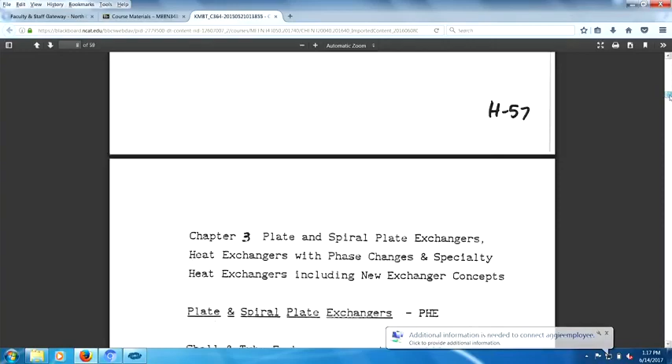So we're starting off on the second set of notes, about a couple pages in. We left off talking about the plate heat exchanger, and we were giving you an example of a plate heat exchanger.

Shell and tube's not suitable for small holdups. Transfer is fast with suspended solids, so there are limitations to shell and tube. As you should know, in design there are limitations and advantages versus limitations.

Here's a picture of our plate heat exchanger. I was saying I wouldn't own one. If you don't open it up, you keep it on, don't clean it, say for 10 years, this would be a great piece of equipment.

However, you got to recognize there's significant gaskets in here. Once you open it up, you have to buy a whole new set of gaskets, and it's quite a challenge to re-gasket this thing. Since there's gaskets between each plate, I often say this heat exchanger is a gasket. The heat exchanger is limited by the properties of the gaskets.

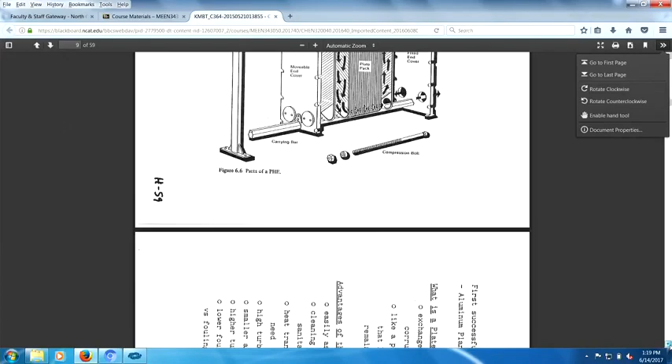So my recommendation is don't use this heat exchanger. Okay.

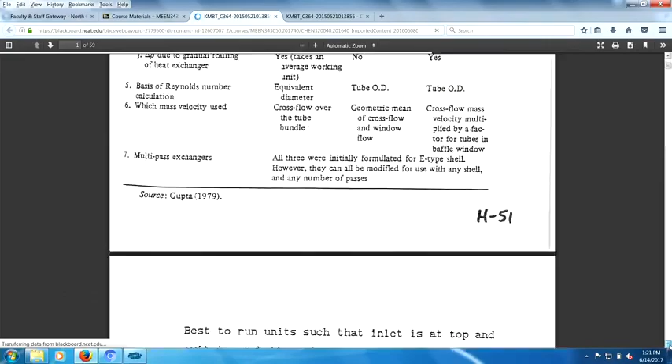Let's see if we can get actually this thing to work right for a change. It's not working right. So we go around. It's not working at all. Anyway. So let's see here. What do we got here? Apparently it's not reading a page, and it's not reading counterclockwise or clockwise. Pretty disturbing, huh, gentlemen and ladies? Wait a minute. We first page here, second page here, and now we got our problems here. How do we get this to be rotated back? And we see that technology fails us again. Simple request. It doesn't work. So what do we want to do here? We want to go back to this thing and reopen the notes and see if we can open them up again. So let's see what we run them down through here. See how far we go until we... there we go. We got this.

So this is one that we were looking at before, and now we continue on. I used to think APV was aluminum paint company, aluminum plant and vessel company. Maybe that's what it was.

First commercial design was 1923. What is a plate exchanger? Like a plate and frame filter press, if you know what those are.

Advantages: easily assembled and disassembled. Cleaning is easy. Meets most stringent sanitary and hygienic requirements.

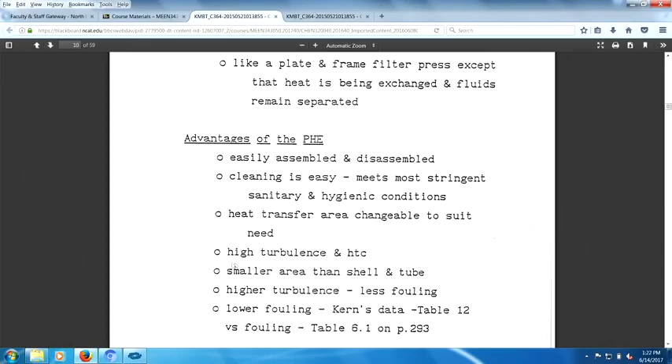Heat transfer is changeable, you can add more plates. It's very important, high turbulence, high heat transfer. A lot smaller area than shell and tube because it's a lot better in the way of heat transfer. It fouls less as well, with higher velocities and less fouling.

Velocities are low, low temperature approach. The log mean temperature difference is fully used. Leaks usually go to the atmosphere, not to the process.

Bad gaskets can be changed. Again, as soon as you open it up, old gaskets never reseal. Low hold-up volume is an advantage.

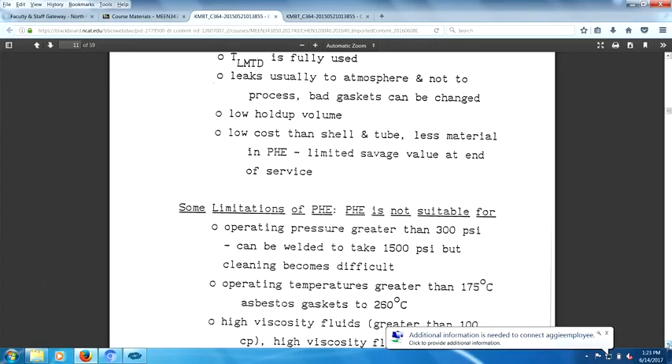Costs are lower, there's a lot less material in here. You're looking at around 300 psi. Now you can also weld the plates shut, so you could possibly go up to 1500 psi. Gaskets usually go to 175C or 260C, depending upon exactly what it is.

Yes, asbestos gaskets do exist. That's pretty hot, and the pressure of 300 psi is pretty high pressure, so those two conditions make it quite a versatile heat exchanger for low pressures and temperatures. These are pretty high temperatures, and high temperatures somewhat.

Velocities, well, 0.1 meter is pretty slow. Average velocities, you're looking for about 2 feet per second. Gas service, due to high pressure drop, includes duties at low pressure.

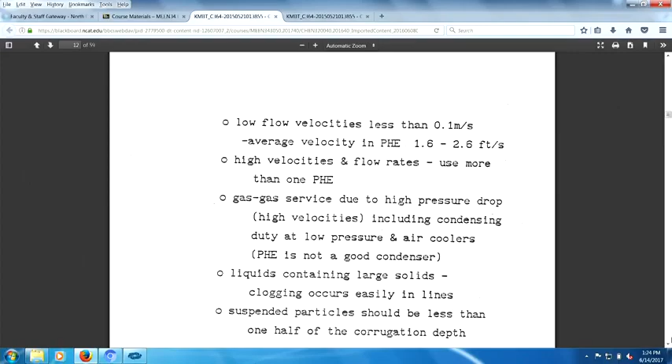Clogging occurs easily in lines, you don't want that. Suspended solids should be less than half the corrugation depth.

You're always worried about solids in the flow. High pressures cause plates to deform, and gaskets fail easily. You obviously need to pay attention to gaskets.

To buy one of these plate heat exchangers would be horrible, because every time you open it up to clean it, you've got to buy a new set of gaskets. The person selling the plate heat exchanger really loves you, because that means you'll have to purchase gaskets in the future, and he gets 5% of the cost of the new gaskets. He or she made 5% on that sale, maybe 10% on the sale of the heat exchanger to you. This is what I'd call an equipment rep.

When they sell you a plate heat exchanger, they're looking for further income in the future when you have to rebuy gaskets. So from their perspective, it's very advantageous for you to buy a plate heat exchanger. From your perspective as an engineer, not so much, right?

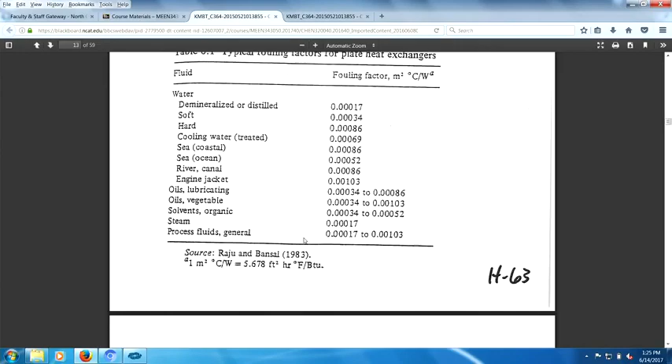Fouling's tough, it's a little difficult. Fouling in a plate heat exchanger is about 1/5 that of shell and tube - few stagnant regions, high turbulence, low residence times, less chance to foul.

Erosion, corrosion is about 2 mils a year. The plates are usually 20 to 40 mils thick. So after about 10 years, your plates may be disappearing on you, which I haven't really thought about - 2 mils a year, and maybe 20 mils thick is the minimum. So 10 years here will knock this 40 down to 20. That's not good. Usually what will also happen is corrosion will be localized.

So 2 mils a year may be an average, but you may have spots in the plates where there's higher corrosion, in which case the vendor will really love you. Erosion occurs from overcapacity use with suspended solids, and occurs over the entire plate. So you use erosion-resistant material.

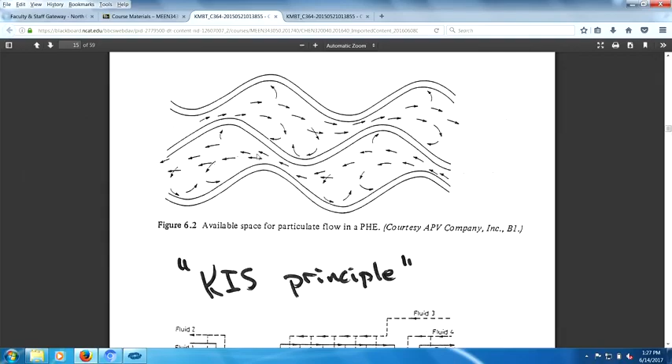Now, this down here is multiple duties. If you buy this thing for multiple duties, you can consider yourself stupid. This is just asking for it. Think a little bit - for example, I have this heat exchanger, and I have to take it down because it's heavily fouled. But because of the stacked nature, I also have to take down this process, and this process too. This ain't a good thing to have.

This down here says multiple duties - see the word 'don't'? What you want is one plate heat exchanger for one job, another plate heat exchanger for the second job, and a third plate heat exchanger for the third job. It's called the KISS principle - keep it simple, sweetheart.

I'm always amused by stupidity that's published, I find this quite interesting. There's a lot of stupid stuff out there, and not only that, they actually sell it, and some people think it's the best thing since sliced bread.

What happens is you give two different people the same piece of equipment and ask them to write a performance review on it. One group will say this thing is the best thing since sliced bread, and the other group will write up a report saying this is a piece of trash, get it out of here. Same piece of equipment, two different evaluations that do not agree.

Now, what happens is I would rotate this for you, but since I'm somewhat delinquent in my capabilities, let's try that again. Let's rotate it, we'll take a chance here, gang.

Pressure limits, temperature limits, flow rates, gaseous flows, high viscosities - look at that, plate heat exchanger is preferable. Flow maldistribution - this is spiral, flow maldistribution is possible. Heat sensitive stuff, you know, there are things that are heat sensitive. Heat recovery, all kinds of little items over here. And there are three different designs: plate, spiral, and shell and tube.

And here, oh excellent, continues on this thing. I forgot to mention that. I had this table 6.2, a great table making a comparison between heat exchangers. This is absolutely wonderful, and you got some more there.

And then you got this thing that we're going to try, I guess we got to click on it maybe, and then rotate it counterclockwise. That ain't working again either. Okay, so apparently we have another malfunction, so we just get rid of that thing right there. Uh-oh, let's bring it back up. Nope, can't bring it back up. There, we bring it back up. So what do we want to go? We want to go back here and hit this one more time. So since obviously we have a problem here, we get rid of that one, and we get rid of that one. So we're back to square one, and I guess this is the way I have to operate.

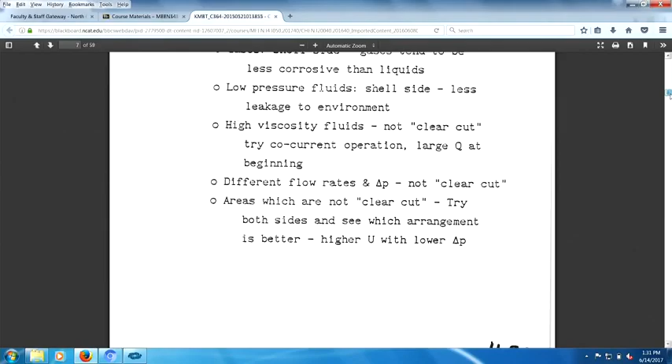So we went through the comparisons. Those are wonderful comparisons for you, right? There they are, wonderful items.

Then we talk about maintenance, inspection, and cleaning here. And you see basically students want an A. A is very good, B is acceptable, D is impossible. So if I take a look at a shell and tube exchanger, I ain't ever going to be able to expand that. And over here, I have a spiral, I can't expand that. But in this plate, I just add more plates. And you look at all the A's over here for this plate.

And then the leakage inspection is B. So they're apparently in a really nice attitude towards plate heat exchangers because they went to sell you one. Now over here you got a combination of D's and B's, and over here spirals. So cleaning, to be quite blunt with you, chemical cleaning, AA. Corrosion inspection, I would have to claim AA on that, I don't know why. Leakage inspection, I'm sorry, but that has to be AA, and this has to be AA, because we haven't really talked about spirals. You know, I wouldn't trust these guys down here. See this? I wouldn't trust these. Because spirals are really great heat exchangers, don't get me wrong. And the C down here for repair, I don't know.

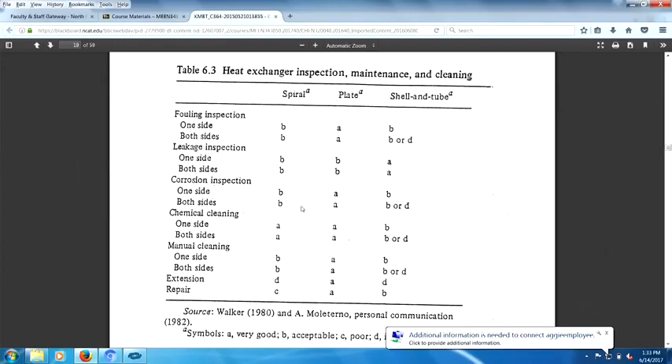Velocities, 3 meters a second, or 10 feet a second, is typical, right? 1 millimeter thick, that's pretty lightweight stuff here, gang.

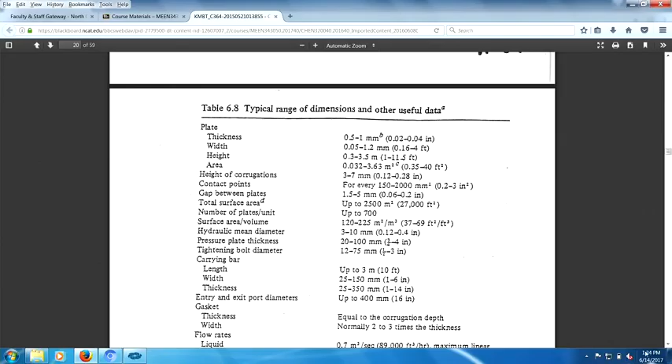Materials: you have seawater, titanium. With chlorine, titanium. What you don't want to have is chlorine and stainless steel. I got chlorine solutions with stainless steel, I'd be careful. I thought chlorine and stainless steel didn't go well together. That would be probably a test question.

Gasket materials, remember, this sets the limits on your heat exchanger. By the way, you'll have these notes for yourself when you take the exam. So what I would probably do was, what gasket material would you not use for fats, right? Or what gasket material would I use for oils? Well, there you go: silicone rubber limited to sodium hypochlorite and low temperatures generally.

Anyway, you got the gasket material, you got asbestos, and you can see that asbestos goes to 260 C. The rest go up to about 150 C, 300 Fahrenheit.

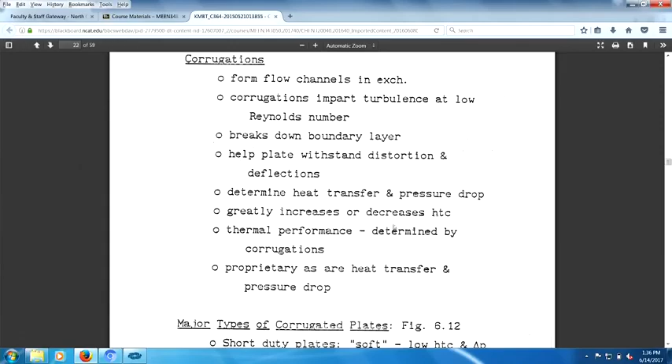Corrugations, right? Break up the boundary layer, determine heat transfer and pressure drop, greatly increase or decrease heat transfer coefficient. HTC is heat transfer coefficient. Thermal performance is determined by corrugations. Now they go into a big thing about corrugations. Whenever you see a V like this, they call them chevrons. One set of V's is called chevron, sort of like the company Chevron Oil Company. So this would be a long duty hard plate, this would be medium duty medium plate, and soft plate duty. And obviously you can see there's a lot more corrugations happening over here, right?

What is the difference between this and that? And you can see whatever these crosses are, it's much smaller over here. And I get the impression that there are more lines, more corrugations per inch here than over here, right?

I have no idea what this is. I don't like heat transfer units. You might get, typically, you want the log mean temperature correction factor to be above 0.7. So you want to maintain it above 0.7.

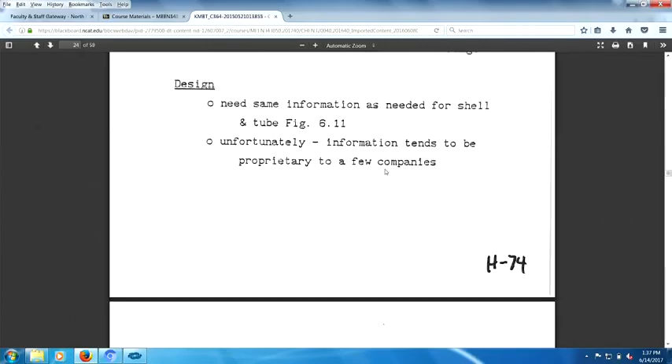Flow in a PHE, you have spiral, loop, complex flow designs. Basically, what do we got here? Here's a design sheet for you. All right, let's go back here.

Let me explain how you design these things. You just go to the company who makes these things and say you need this, this, and this, and they will do the design for you. Shell and tube design information is out there in the real world. If you do computer design of shell and tube heat exchangers, you're probably using some version of Bell Delaware. However, nobody was heroic and published information about plate heat exchangers, so a lot of that information is proprietary. As a result, you don't have any information, so you just turn it over to the company and let them do the design for you. Design sheet, all right.

I suspect that if you looked at the correlations, pressure drop and heat transfer coefficients will be similar to shell and tube heat exchangers. Leading coefficients will be different—that's the proprietary nature of those. The exponents on those will probably be different as well. Wide variety exists in equipment and applications, but physical properties are fairly constant.

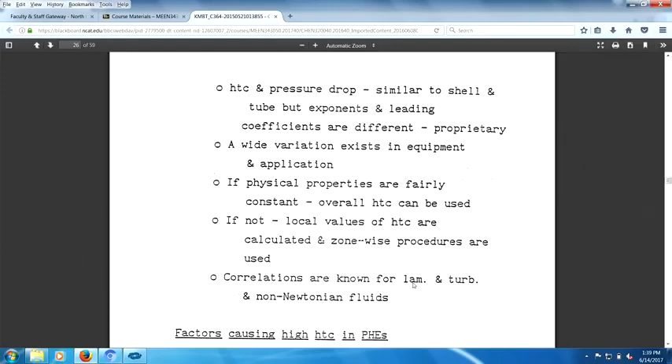Correlations are known for laminar, turbulent, non-Newtonian flow. High turbulence, great thing. Low resistance, easy cleaning, low fouling resistance—doesn't foul. Thin plates and the heat transfer coefficient typically there. Now a shell and tube, this would be maybe down around 300 or less—that's BTUs per hour foot squared degree F.

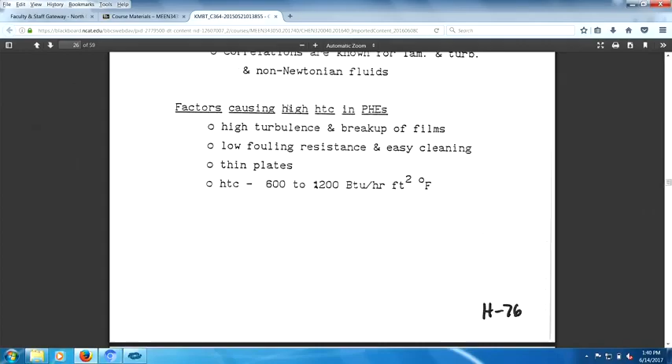Design—this is kind of a funky design method, I wouldn't bother. And here, I think this is what your book actually uses, a number of transfer units, if I'm not mistaken. But like I said, you just go talk to the vendor and have them do the design for you. You don't want to play hero—playing hero often gets you killed, right? So you become vendor dependent, and that's okay, so long as the vendor is capable. In which case, you should try to do vendor testing.

I don't know if you realize it or not, but they're just ordinary human beings, and you can have them take tests. Maldistribution—this is a major problem. Flow maldistribution occurs everywhere, a major problem in industry. Flow is not going where you want it to go, hence we call it maldistribution of flow. Occurs in particular with high viscosity fluids. When I say high viscosity fluids, that really means high technology type fluids, the things that matter. It usually happens with low and high flow rates, and for plate heat exchangers, it happens for long plates. Trapped air bubbles or trapped gas bubbles in liquids is not uncommon, and also due to different pressure drop differences in manifolds. I bet you don't know what a manifold is, do you? So we'll make that a test question—tell me what a manifold is.

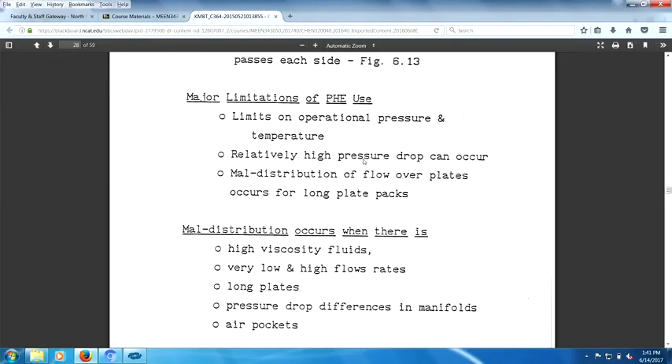Maldistribution affects heat-sensitive materials. Now, what is a heat-sensitive material? Most everything will burn, so most everything can be heat-sensitive to some degree—it's a matter of how much heat-sensitive it becomes. A good example of heat sensitivity is perhaps cooking. Heat-sensitive materials—food often burns, so obviously you've reached the heat sensitivity nature of that fluid. I suppose if you're making scrambled eggs in the morning and you scorch your eggs, it doesn't look good on the plate. That's a heat sensitive material, right?

Okay, other applications might be vaporizers and condensers. I don't know about that—climbing film condensers. There's no volume in a plate heat exchanger, so I don't know if I...

Anyway, let's go on to spiral heat exchangers. This is fantastic. So your assignment is I want you to go to the grocery store and buy a jelly roll. You'll notice a jelly roll looks like this, and this will be a spiral heat exchanger.

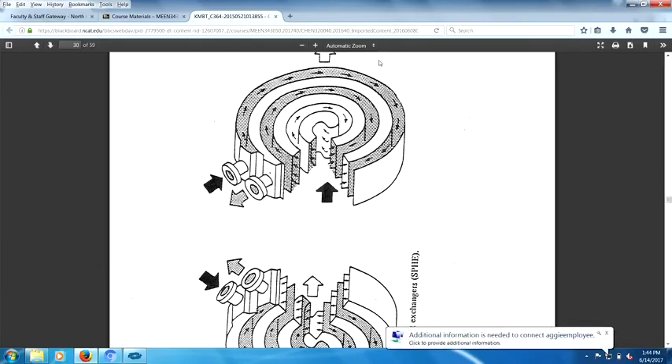All they do is take two plates and put them on a mandrel or shaft and rotate it. As they rotate, they wrap them differently—they put in spacer studs and continually wrap the heat exchanger around itself. So let's see what we got here.

We should also say that this channel may be open for cleaning. If this channel is open for cleaning, that means it's welded shut down here. So one side of the channel is open so you can clean it. This channel, since this one's open, this one's welded shut. By having a welded, unwelded, welded, unwelded pattern, they can keep the fluids separated. The channel cover fits on top of this thing.

These spiral heat exchangers are pretty much everywhere. There's different ways of operating them. You can operate them as a total condenser, say on top of a distillation column. This thing right here is a condenser - vapor coming in, being cooled by the darker fluid and collapsing here, and the excess vapor goes out the top.

Or potentially you could have something looking like this. The fluid coming in is exposed to all these spirals here. They're not counter spirals. But up here they are counter spirals - so this is a regular shell and tube. Let's see what they call the other ones: spiral, spiral cross flow, spiral flow combination, spiral cross flow.

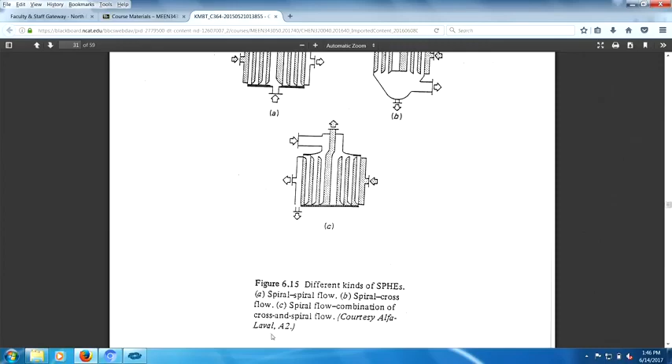One major manufacturer - there's 3 or 4 actually - one major manufacturer is Alfa Laval. I want you to go on YouTube and type in Alfa Laval and see if there's any videos for you to watch.

So fouling deposits are low. This thing can handle lots of slurries and large particulates. In other words, it would be very good for a strawberry jam with large chunks of strawberries in it - no problem. Fluids can always be in countercurrent flow, which is wonderful.

Log mean temperature difference is fully utilized, except in cross flow. Close temperature approaches can be reached, and if I was taking this course, I would raise my hand and ask, Dr. Tatterson, what's meant by close temperature approaches? That way you're less susceptible - so I'm not going to ask that question. If you don't know the answer, don't blame me.

Small sizes, easily mounted, heat transfer coefficients are high. No leakage, low maintenance, easy maintenance - great, that's true. No large thermal expansion - if it expands, it expands differently. And of course we have the three different types here that we already showed you.

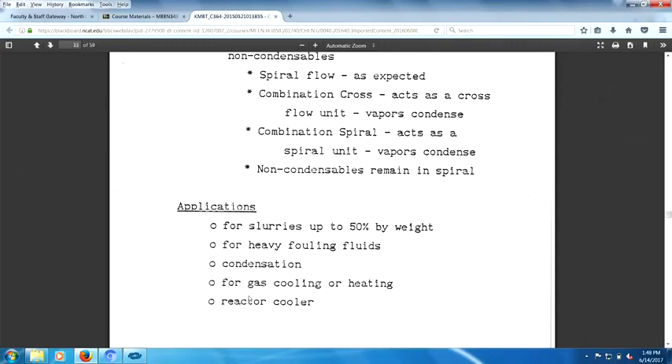Applications: well, 50% by weight solids, that's pretty good. Heavy fouling fluids, that's good. Condensation, that's good. Gas cooling and heating, that's good. Lots of applications. For those of you in mechanical engineering, you should recognize that chemical engineering companies and the petroleum industry hire an awful lot of mechanical engineers, so you shouldn't poo-poo that.

Anyway, it can be expensive - as expensive as shell and tube. Pressure limitations: we said 300 psi, well maybe it's 250, it's practical. Temperature limits, practically none - units have been built to 250 C. Of course that's a function of the gasket material. Area is limited to 250 square meters. Heat transfer coefficient is 500 - that's pretty good.

Not good for thermal cycling, not good for cyclic temperature service, unless metal gaskets are used. Expansion and contraction grinds ordinary gaskets - that's true, gaskets never reseal. Let's see what else we got.

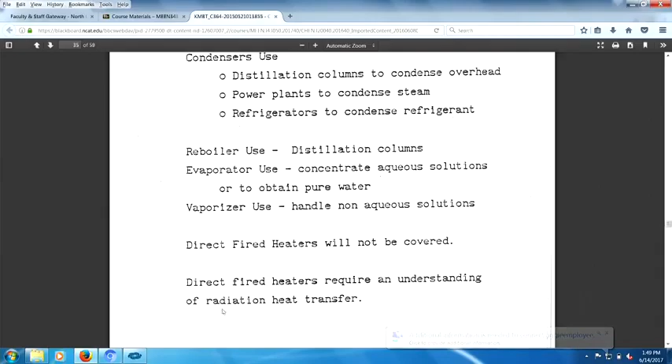Exchangers with phase changes - there you go. Vapors, liquids, evaporators. By the way, the power industry also hires a lot of mechanical type people, you know what I mean - refrigerating, power plants, making gasoline. Anyway, we're not going to talk about direct fired heaters. That requires an understanding of radiation heat transfer. We'll get to that understanding a little later, but we're not covering them here.

Bayonet heat exchanger - I love this device. What happens is this is a pipe inside of a pipe, and it's capped off. The flow comes through the center pipe, comes around and exits right up through there, so there's an annulus formed. As it turns the corner down here it boils off, so you have significant boil off happening if it was designed well. Boiling will take away an awful lot of heat - if you want to take away heat, boil.

Okay, yeah, oh look at that - what do we got? This is a discussion of condensation. I guess that's what we're going into, right? No, I don't think. Anyway.

Take a look at what we have here - classification according to condensation. We have two major groups of people involved with condensation: power industry and chemical process industry. Dropwise condensation doesn't happen much, so you're left with filmwise, where a liquid film forms, and direct contact condensation.

Example of direct contact condensation: there's a big huge tank up in Abbott Labs. Pharmaceutical companies employ mechanical engineers as well. This 10,000-gallon reactor was as big as whatever room you're in, so we're not talking small. It was filled with really hot steam, and this one engineer turns on the cooling water spray into the hot steam in the big tank, causing significant condensation of the steam involved.

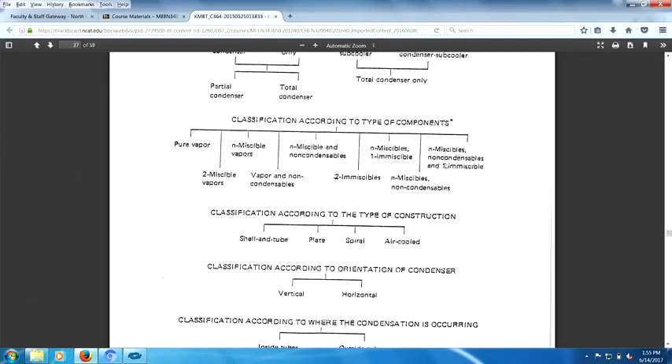And then we have vertical and horizontal condensation, inside or outside tubes. We have gravity controlled - this is natural. And we have shear controlled, which means there's a pump or some sort of prime mover involved.

So I want you to set it on the countertop, and I want you to observe the dropwise condensation that occurs. It's a very faint covering, looks like dust. Basically, the drops do not combine, they stay - no films form, no added resistance. Condensing surfaces have to be specially prepared - well, if you're taking it out of the icebox, it's not that specially prepared. Gold, Teflon, waxes help. Doesn't happen in the plant environment.

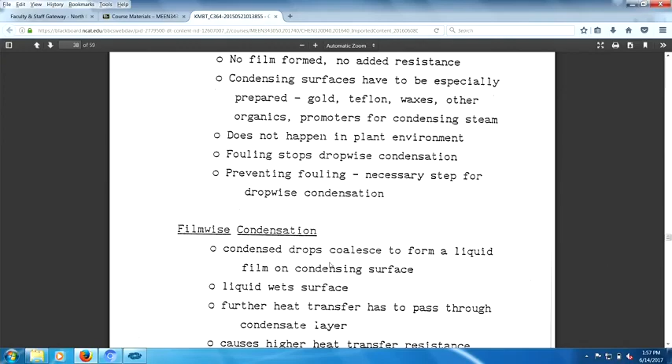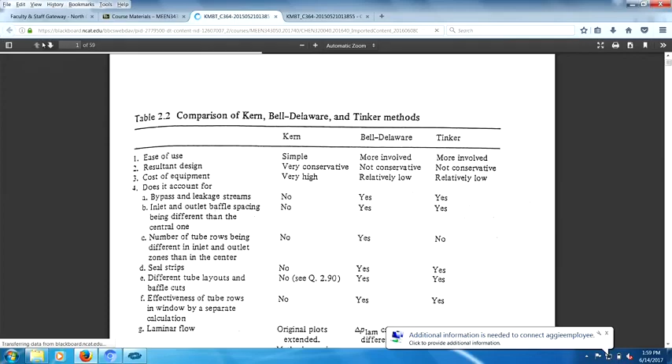Voila! So let's see what we got here. We can only rotate once, then we go to hell. When things don't work out for you one way, then you're just going to have to beat the system, you know what I mean? When you stop one way, what are you going to do? Roll over and play dead? No, you just get up and attack it a different way. Okay, so there you go.

Direct condensation, right? Direct contact condensation. Subcooled liquid sprayed into vapor. Spray towers used, good method for condensing. Very high heat transfer coefficients. No surfaces, so nothing to foul. No fouling, no material barrier, little thermal resistance. Operating costs: no tubes, no surfaces, no pressure drop.

Use is limited but fast growing. There you go. Smart things actually rise to the top. Maybe, unless you're surrounded by dummies.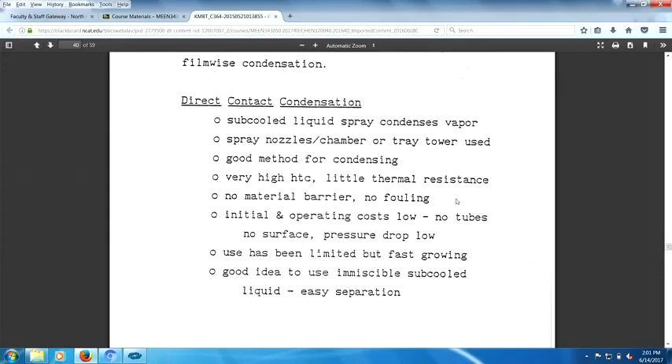Anyway, give you an idea what that looks like. Let's go ahead and do it. You find the liquid coming in, a curtain, a liquid curtain, falling down to another liquid curtain, a tray of liquid, another liquid curtain. So if I have vapor coming in, the vapor has to go through this liquid curtain - it's called a waterfall in nature. It goes through that and that and that. By the time it comes out, it's fairly well condensed.

Or over here, you have vapor coming in, hitting a stream of very cold water, condensing out most of the perhaps steam that's coming in, and venting the non-condensables.

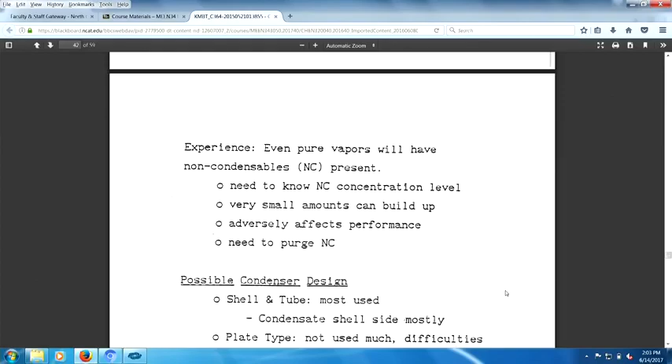So what do we got here? Let's see what else we got. Possible designs: shell and tube most used, plate not used much. Remember, you need large volumes, I think, large surface areas. Small surface areas needed, broad flow passage required, less likely to clog, air-cooled designs out there.

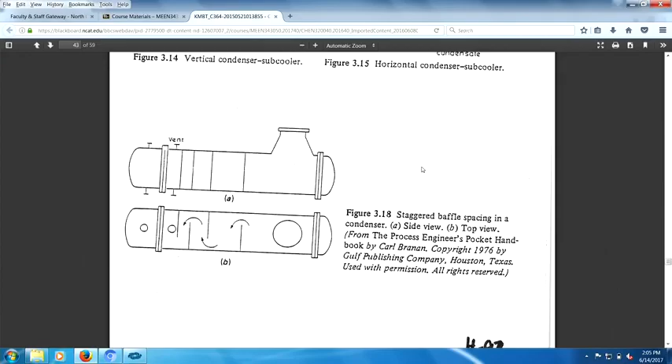And then we have a standard view of a condenser. Vapor coming in, these are supposed to be baffles. Vapor coming in, you got a bunch of tubes in here condensing it out. So there's a modest decrease in flow here, going across that tube bundle, and some more decrease in flow here, going across this bundle. So as you're going down this condenser, there's less and less gaseous flow because it's all being condensed out, right? So you got perhaps an exit nozzle here, perhaps. You may have to throw in a vent to get rid of the non-condensables. Oh, there we go, there's some more stuff there.

Various methods for calculating heat transfer coefficients for condensers. If you look, there's Nusselt, Colburn, Kearns, Dukler, Ward's, Bell and Ghaly, and Butterworth's. So you got a number of ways of doing this. Emerson's method is also available. If you look up here, it's widely used for multi-component partial condensers, accounts for cooling the condensate, condensing inside and outside, with and without temperature, with or without vapor superheat. So this looks like really hardcore stuff.

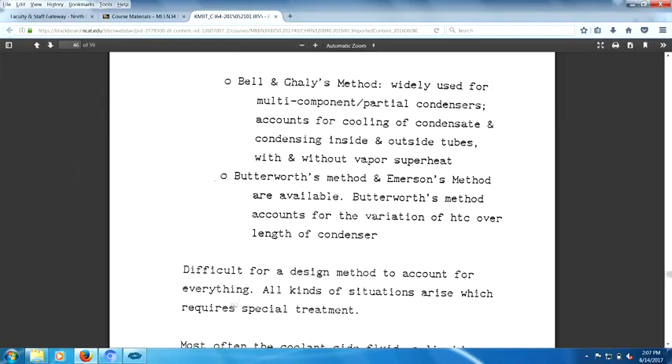It'll put hair in your brain. Now down here you have probably another method as well, accounts for the variation of heat transfer coefficient along the condenser. Don't want to hurt your feelings, but it's difficult for a design method to account for everything. All kinds of situations arise that require special treatment. You got to realize that the person using the equipment may be doing things that weren't anticipated in the design. So you got a design sitting out there, and the person uses it in a different manner than what it was designed for. This occurs often, right?

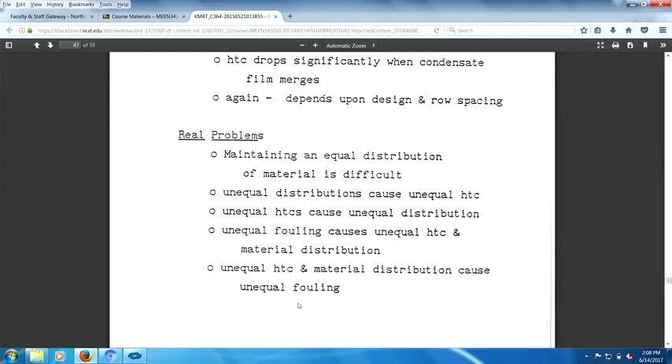Condensation over tube bundles, differently for horizontal and vertical. Real problems. Okay, maintaining equal distribution of material - there you go, this is the flow maldistribution problem. Unequal distributions cause unequal heat transfer. Unequal transfer causes unequal distribution. Unequal fouling causes unequal heat transfer and material distribution. Unequal heat transfer and material causes unequal fouling. They're all sort of in there together.

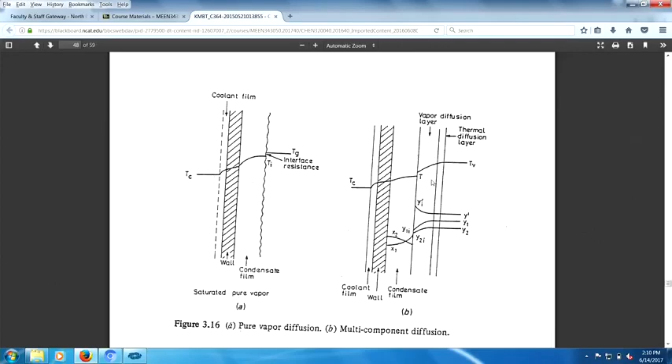So what you need to do is have a situation - you don't have to accept it, right? You're going to have this problem, but you don't have to accept it. So you keep this surface disturbed, basically. You don't necessarily want to disturb your condensation layer, but since this is vapor, you do want to have a strong breeze across the condensation film so that you can get rid of that diffusional layer, right? You don't want this to happen - you want to get rid of this. This is gas. So, anyway.

So you're looking for a low surface tension, obviously. And we know the three things that affect surface tension: purity of the surface, temperature of the surface, and electrical charge at the surface. Be curious to understand how electrical charge can affect the operation of a condenser. That'd be kind of interesting to worry about.

Wouldn't it be funny if you went and took a 9-volt battery, which is basically harmless, and hooked it up to your condenser, and suddenly you got an improvement of 100% just because you put a little electrical charge on the water or the liquid condensing?

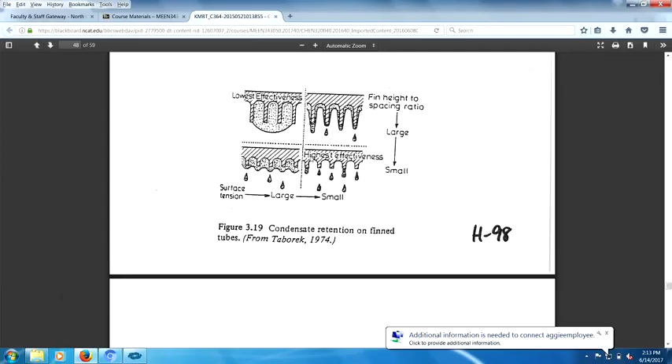Anyway, electrical charge can wind up killing you as well. You haven't died from a 9-volt battery, no, but stop to think about it. I want you to go on YouTube and type in 'gasoline stations, comma, static electricity' and type that in. This could be static electricity, this is charge right here. Go next time when you fill up your gasoline tank at a gas station, read the signs around the gas pump. Might save your life.

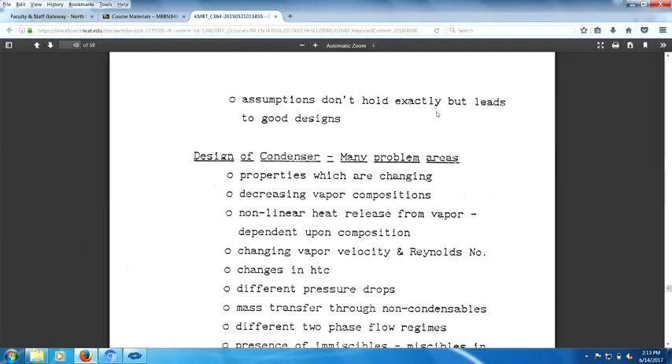Design of a condenser, you got many problems, right? Bam, bam, bam, bam, bam, bam, bam. Fogging is one. Presence of immiscibles, different flow regimes, mass transfer through the non-condensables, pressure drop.

So let's get real here, gang. What do you do? Well, got news for you. You're not gonna, you build the best condenser you can with the most versatility, robustness, nimbleness, ease in cleaning, right? You build the best one you possibly can, and then you use it. You'll have some of these problems too, true, but you got the best exchanger or best condenser that you could possibly have, so you go with it because you ain't got anything better. That's how you do design when you don't know much. You go with the best equipment you can and hope for the best.

Fogging happens all the time in nature. Great Smoky Mountains, called smoky because of fogging. Anyway, it's not uncommon for condensers to have fogging involved. A whole bunch of problems, far more difficult than a heat exchanger design. Problem areas, yeah, fogging, there you go.

One of the interesting things about processing or whatever is you make assumptions and you think that's the way it's going to happen in your design, and it just don't happen that way. You know what I mean? Surprise! Lots of surprises in the world. Can you imagine?

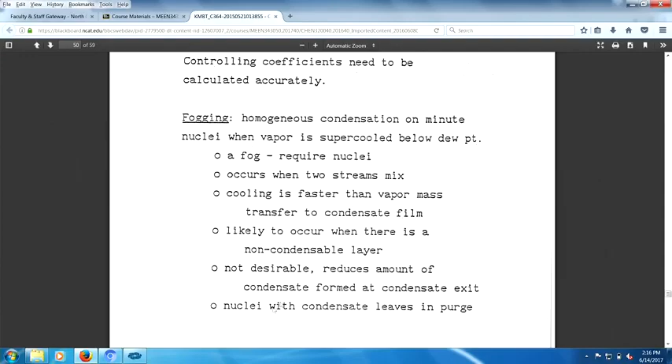Homogeneous condensation on minute nuclei. Anyway, nuclei leaves with the purge, hopefully. Fogging is a good, interesting point. To avoid fogging, there you go. You didn't even realize fogging was going to happen. There's some design recommendations and suggestions.

Ooh, look at that, some heat transfer coefficients. Look at that, superheat can be ignored, unless it's 25% of the total heat load.

Condensing, you want to use vertical tubes. Actually, you don't want to use vertical tubes, you want to use vertical tubes with rims, so the liquid film will flow off the rim and expose fresh tube area for condensation.

So you use impingement plates; vibration due to impingement plates will prevent erosion, that's very important, and also limit possibility of vibrations, right? Baffles should cause the vapor flow over the tubes. Baffles should be staggered, maintain equal velocities over the tubes. Baffles will prevent dead zones, direct vapor path from inlet to outlet should be avoided. That's pretty funny, you got this very complicated inlet and exit right across from each other.

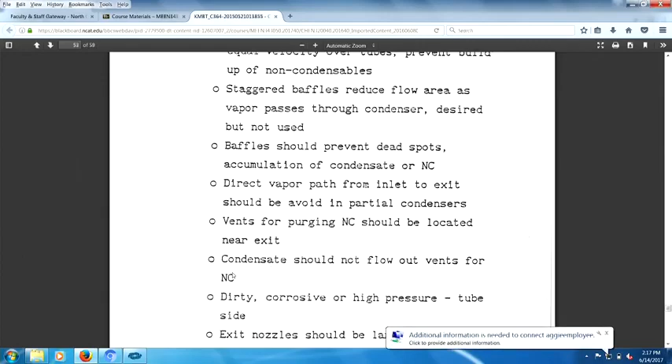So you have this very complicated design, the flow comes in, leaves the exit, doesn't even go through the equipment. That's not uncommon. Vents should be located near the exit. Condensate should not flow out vents for NC, non-condensables. You want the dirty stuff, hard stuff on the tube side.

Exit nozzles should—here's the condensation spec sheet, there you go. Other condensers here, there you go. We should cover that, I guess.

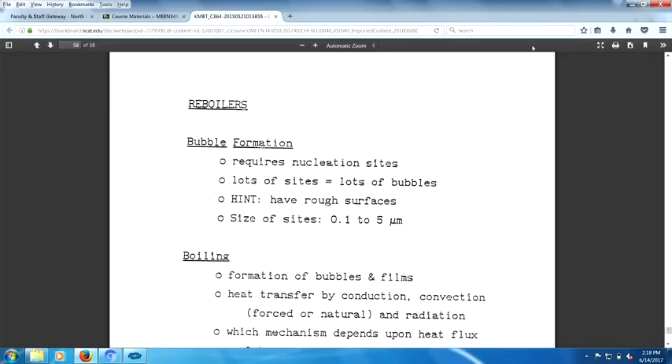Boiling we'll talk about a little later. Reboilers, right? We'll talk about that when we get to them. And that brings up the end of that. So we go back here and go to notes 3 and see what comes up.

Boiling, different forms of boiling. For the most part, skip this for a bit. We may come back to it. But that will be Chapter 9 in boiling. Famous curve - this is kind of interesting. Let's just stop for a moment.

You have liquid coming in here, and you have vapor coming out at the top up here. So you have very high density fluid and very low density fluid. And you know that rho V A equals rho V A. So you have high density, low velocity, and low density, very high velocity. So the velocity change in here can actually be a factor of 1,000 - comes in at 1 foot a second, leaves at 1,000 feet a second. What's the speed of sound? Does it form a shock wave? That's interesting. So I want you to recognize that there's a huge vapor expansion going on.

Test question might be: what volume does 18 cc's of water have when it's turned to a vapor? 18 cc's of water as a liquid turns to a vapor, what volume is created? So you have a huge - basically what you have is the vapor explosion in here. Okay, so that just gives you an idea.

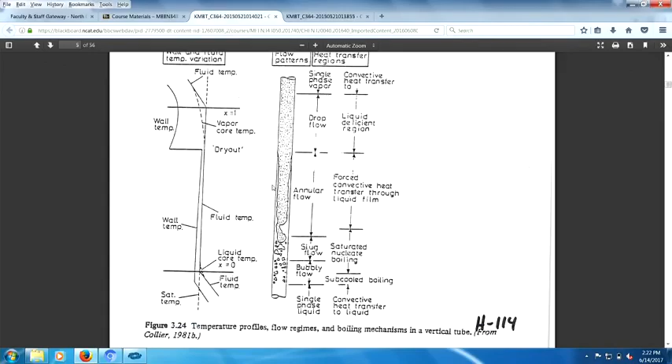Horizontal - first off, this is vertical. Horizontal's terrible, this is asking for disaster. Orientation-wise, this is a reasonable design, vertically upward. This one, you got stratification happening in here, and I'm a bit leery of this.

Going back up here, you should also look at this point right here - the dry out point, as it goes by various names. Dry out point, burn. Dry out means it's no longer wet. Burnout, it's often called the burnout point. And it happens right here, except it doesn't happen exactly right here - this liquid film is going to be bouncing around. But if you take a look, there's a huge temperature change here - the wall temperature undergoes a drastic change. Now, since this film is not exactly fixed at one location, it will bounce around a little bit. This temperature change will bounce around, become a little bit fuzzy. But there's a lot of thermal stresses happening here, right along here.

And this is where you can have fatigue wear, basically. The metal becomes fatigued because it's undergoing very high temperature and then drops down to low temperature, high temperature, low temperature, high temperature, low temperature. It fatigues. So I got another experiment for you to do.

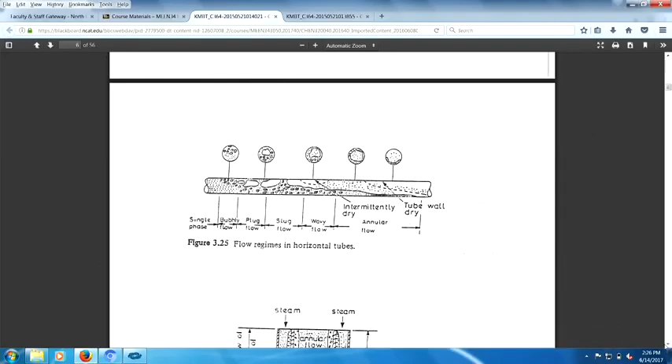So there's a big difference between horizontal pipes and vertical pipes. As an engineer, you need to pay attention to the orientation of stuff, right?

Now this is about the coolest thing I've ever seen. This is a double pipe heat exchanger, right? First off, we got to realize that up here we got the pipe wall, with a double pipe heat exchanger. So you have a wall here, then the annulus volume, and then a pipe on the outside sitting there. So you have a pipe inside of a pipe, creating an annulus in here.

So the steam is coming in and condensing. It's condensing all along here, right? It fills up the film condensation, and it's pictured over here as well. And then inside here, this steam coming in, you have liquid freon going to vaporous freon. So you're boiling off your freon.

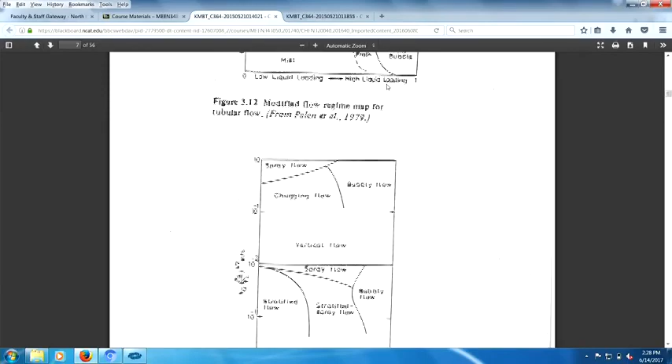I wouldn't trust any of them, right? They're not to be trusted, right? Two-phase flow is real tough. Multi-phase flow, that means more than two phases, right? Or two-phase flow could be multi-phase if you want it. And you'll quickly find out that it's a tough area to get into because you got all kinds of very strange flow behaviors. Lots of orientation effects.

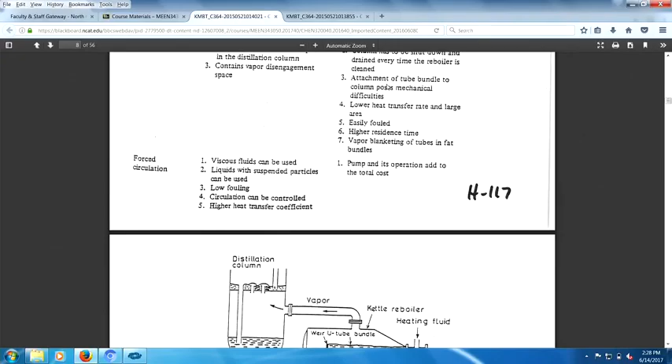What you want to pay attention to is the vertical siphon and the horizontal siphon. Thermosiphon, there you go. The old type, I don't know. Internal bundle, boy, that's a mistake.

You got the kettle reboiler, got the weir, U-tube, baffle plates. You got the liquid level determined by this weir. So you don't have a loop seal, you have a weir in there. Comes in as a liquid, boils, and leaves as a vapor.

What you don't want to do is have too much heat in here where the liquid drops. It's very easy, perhaps, to have a liquid level down here. And that would mean that half the tubes are in the vapor space. That ain't good. That ain't good. That ain't good operation. It's not good.

Heating fluid coming in and leaving. In a control situation, you want to have this liquid height maintained. Now, you maintain that liquid height, in fact you wouldn't mind having a little spillover, by regulating the flow of the heating element, heating fluid.

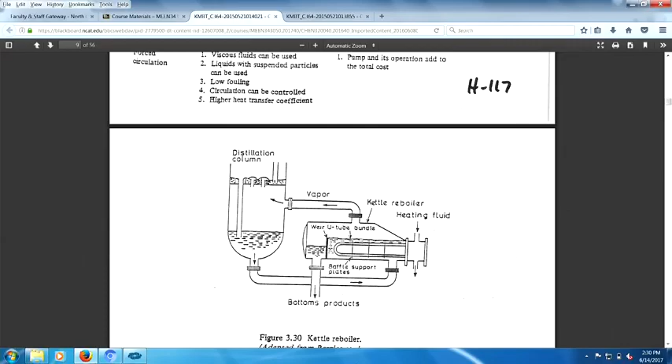Now this is a ridiculous unit, ridiculous design, because when I remove this I shut down the entire column. Not such a great idea necessarily. See, what can happen over here is I could possibly have a couple control valves to take this unit offline to clean it and then bring on another unit over here. And as a result, I don't shut down the distillation column. Over here, when I yank this out, the column has to come down.

Up here, with this design, yeah, I take this offline, but I could potentially plumb in another heater here. But even to get this thing out, going back to this other design, even to remove this thing, I have to have no liquid in this region here. All right, so anyway.

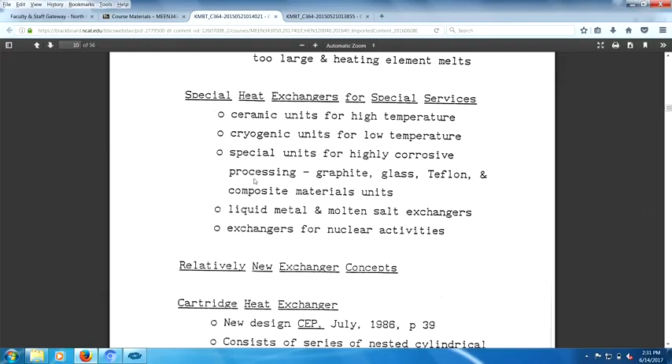Special service, there you go. You got all kinds of heat exchangers out there, and you have a lot of, how can I say it, a lot of wackos out there. You know wackos? People running around with really great, sensational, change the world type of ideas. And the world tends to change slowly. Even everybody who owns a cell phone, it took them a while to learn how a cell phone is used.

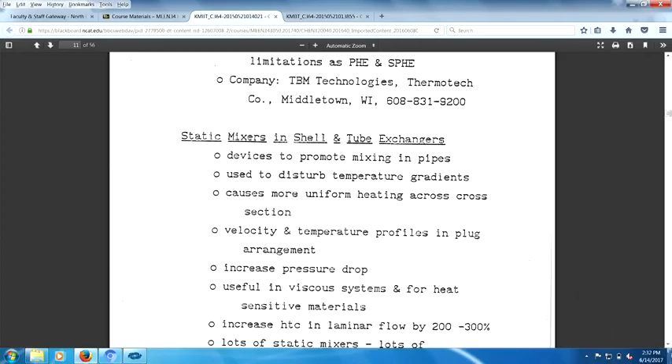So we have cartridge heat exchangers. And what's really funny is static mixers. Now my original area of expertise was in mixing, so I was talking to a guy about static mixers, and he didn't really want to talk to me, trying to squeeze some stuff out. And then I told him I taught heat exchanger design. His attitude towards me changed. Bam! I was his best friend from long back. I went from a nobody to his best friend long back. Couldn't get enough of me. Because what he wants me to do is sell a whole bunch of static mixers.

You realize how many static mixers can go in a shell and tube heat exchanger? There's 300 tubes in the exchanger, and they're 16 feet long, and each static mixer is maybe 6 inches, so they're stacked in there. I'll tell you, there's a picture of a static mixer right there, from 1979.

And static mixers are actually very wonderful. What happens, it's the device, it's a pressure drop device. Requires a pressure drop to do this. Where a pressure drop requires you to pay a utility bill, right? Because the pressure drop times volumetric flow rate is power, and we're going to pay a power bill on our heat exchanger.

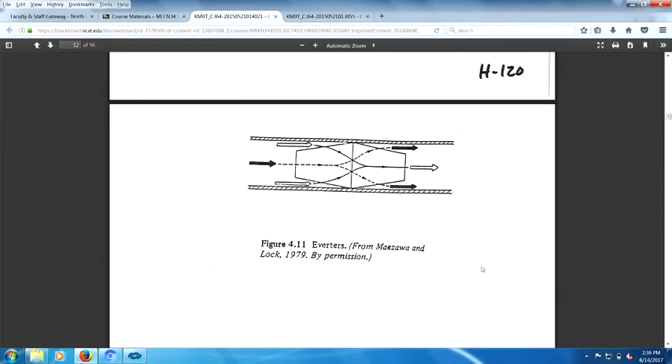The other device that's very useful is you take a pipe and fill it up with metal spheres, right? Metal spheres contacting metal spheres, got a whole bunch of metal spheres packing up this tube. That's also a very excellent way of doing heat transfer, if heat transfer is what you're wanting. Static mixers is a great idea.

Right. This thing's copyrighted. Actually, no, this thing's stolen.

Static mixers have been around since about 1901. Right now it's the 1970s, so by the time this was written, static mixers had been around for 75 years. The first static mixer was chains - they'd put chains in pipes and weld them in. The chains would have one fixed point, and the rest would flop around, which helps disrupt the flow. So the first static mixer was chains welded inside pipes.

Great idea, works wonderful. Can I buy that? Yeah, you can. Go down to the hardware store, get some chains the size that would fit inside your pipe. Buy a big length of chain, weld it in there at some local machine shop, and you've got a sensational static mixer.

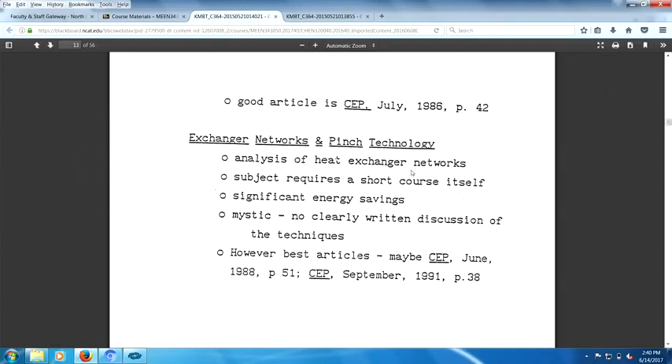Into the 1990s - analysis of heat exchanger networks, significant energy savings. It's mysterious or mystic, with no clearly written discussion of the techniques. I suspect it's sufficiently disorganized that, considering the options you can make, it probably never gets handled very well.

Well, when I wrote these notes up, there was something called BJAC, the Bell Delaware method. That's the one that got set up, and it's become a computer package - the Bell Delaware method. By the way, I should explain the Bell Delaware method.

University of Delaware, after World War II - that's 1945 for those of you who aren't good at history. After World War II, the University of Delaware, with a consortium of companies - DuPont, Dow Chemical, Union Carbide, various companies - decided to study heat exchangers. So they set up research inside the University of Delaware to carry this out. Over a period, say 1945 to 1960, they produced a large number of PhDs in chemical engineering trying to figure out how the hell a shell and tube heat exchanger worked. That got written up in all kinds of dissertations at the University of Delaware.

Do you hear the silence? You know what happens to PhD dissertations? Nothing happens to them. They grow dust in some university library and are never implemented.

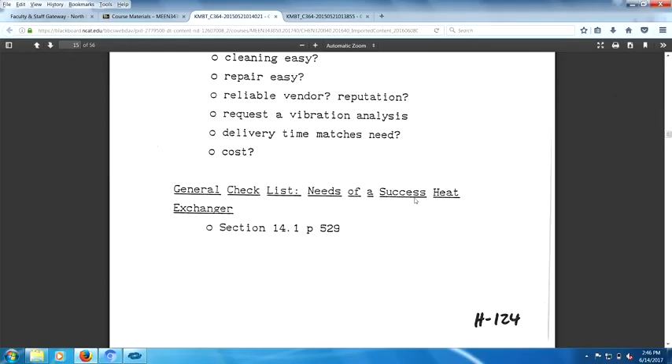So you go to Yokell's book - this is Gupta's book actually, section 14 - needs of a successful heat exchanger, there you go. Some causes why heat exchangers fail to perform, also from Gupta's book. I don't think Yokell's book gets up to chapter 14.

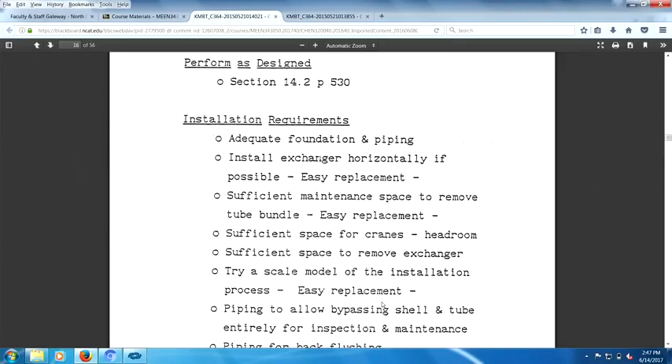Installation: adequate foundation, piping installed horizontally, easy replacement when needed. Sufficient maintenance space to remove the tube bundle, cranes for headroom, sufficient space to remove the heat exchanger. You might do a scale model. Piping to allow bypassing the streams for easy inspection and maintenance, piping for backflushing, purge chambers, instrument alarms.

Appropriate lifting lugs - wouldn't it be funny if you built a heat exchanger you couldn't lift? You want to lift the tube bundle by the baffles and the tube sheet. If you lift the tube bundle by putting straps under the tubes, you should be shot at sunrise. Adequate drainage so one can tell when the heat exchanger is drained.

Check for shipping damage, tightness of channel covers, remove all preservative materials and dry the exchanger, remove shipping and foreign materials. Make unforced piping connections - that's very important. Forced piping connections mean you're forcing two pipes together, and when you undo those, they'll spring back and could hit you in the chest and you die.

So you better be careful. You don't want to make any forced piping connections, and even with unforced piping connections you don't necessarily want to be around when they're decoupled, because things may have changed on you. Supports should allow for thermal expansion - rollers and V-slots. Pressure test your exchanger.

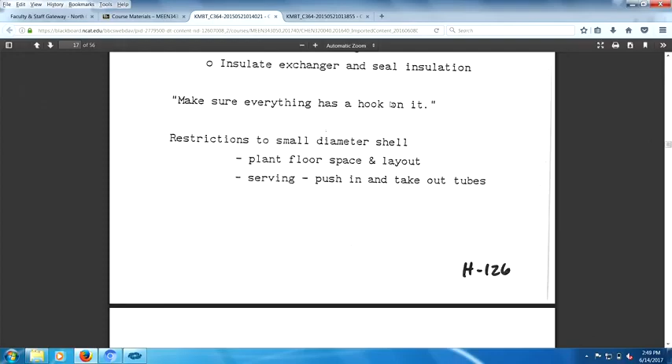Commissioning a heat exchanger: startup, things you need to start. It may operate better than you expected, but you've got to be careful - if it's operating better than expected, it could cause problems downstream. A bypass stream may be necessary until the exchanger fouls to design. That's the other thing - the exchanger fouls to design.

It doesn't foul anymore. Take your car - it says to flush your radiator every year and put in new fluid. Now, I'm not quite sure you want to do that.

Your car radiator is a heat exchanger. Basically what will happen is it will foul, to a certain level, after which your radiator fluid doesn't have any more fouling agents in it. In a sense, it's all fouled out. So you foul to design, and you don't have to worry about fouling afterwards.

Now you come along and they say, well, you need to change your radiator fluid every year. So now every year you put in new material which has to foul. So by servicing your radiator, you're actually perhaps building up a level of fouling in there, which may then be a real problem.

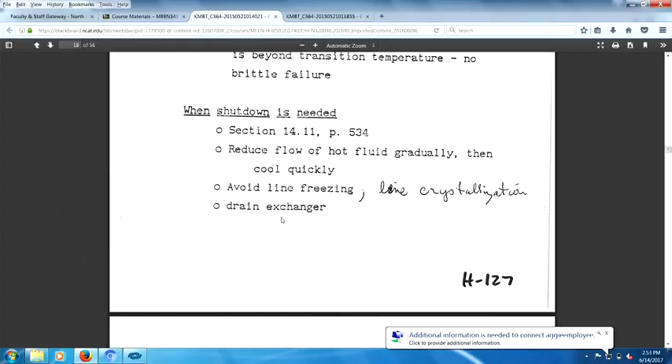Let you try to think about what you're doing. You do know what a bath is, right? A bathtub. You're not a shower person all the time, are you? Anyway.

Checklists: baffle breakage, tube ruptures, tube sheets can break, flanges can break, seals, tube rupture.

How do you monitor tube rupture? Well, you're always checking the exit streams of your heat exchanger. The rupture of a tube will be detected by a composition change in your exit streams, right? That way you know whether you have a tube rupture or not. The leak will go one way, and it will be determined by the pressures. It's either leaking in or leaking out of the tube, right?

Operations before tube rupture: rattling noise in the exchanger. Leakage increases, heat transfer and pressure drop change, material cross-contaminates. Sample streams for contamination.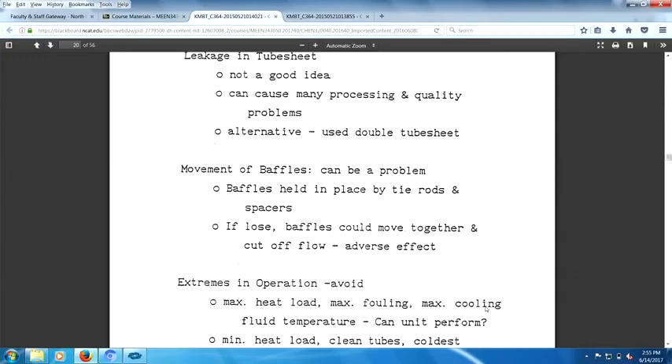Extremes in operation: you've got very high heat load, maximum fouling, maximum cooling, all kinds of nasty stuff going on there. Don't want the streams to freeze, boil, run dry, or maybe run full. Minimum heat load, clean tubes, coldest fluid temperatures - extremes in operations you should try to avoid.

It's really funny, a story. A feed tank up in Cincinnati, Ohio - it was essentially a large water tank, and basically they used it as a water feed to their process. One day they got there on a very cold night where the temperatures dropped below 32 degrees Fahrenheit, and the entire tank froze up on them. So when they went to get the water feed they needed for their process, the water was all frozen.

They forgot to put a heater in the storage tank. Oh, mamma mia, Colucci. There you go - forgot to put a heater in the feed tank.

Don't want the streams to freeze. There you go, prime example. That was Procter & Gamble, Cincinnati, Ohio. Also one of our students was in charge, and they forgot that water freezes. I guess they never seen an ice cube before. Huh? Anyway, just kidding.

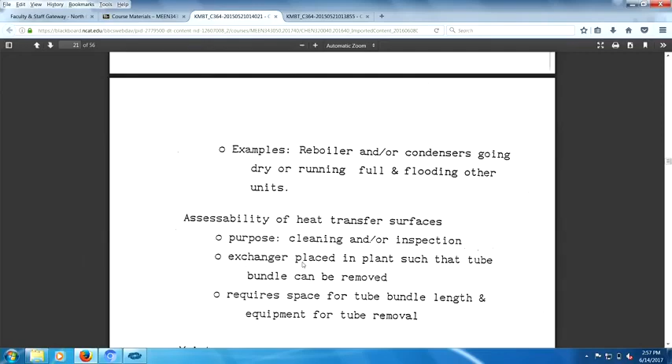You want to clean or inspect. The heat exchanger tube bundle can be removed. This requires space for the tube bundle length. There you go, that's maintenance.

This is a really fantastic set of statements here. Maintenance should begin at the design stage. Got it? Maintenance should begin at the design stage. Maintenance should be built into the design. You want to make maintenance easy and have the maintenance people work with the designers, manufacturers, construction during erection.

Now, the maintenance people, they're the dummies, right? No, not necessarily. Maintenance can have a lot of smart people there. They may not be paid well, and they may not have respect from everybody else, but you need to pay attention to maintenance people. I always like to bring the operators and maintenance people coffee and donuts. You know what I mean? Look at me, I bring dozens of donuts to my students. Same sort of thing. There's a significant human aspect you need to pay attention to in order to get information.

You see, the third shift, if you bring coffee and donuts for the graveyard shift, around 3 or 4 a.m. in the morning, sit down and talk with them, they'll tell you all the things the first two shifts are doing wrong. They'll tell you the first shift is doing this wrong, the second shift is doing that wrong, and so you get a whole bunch of information just from using your personal skills.

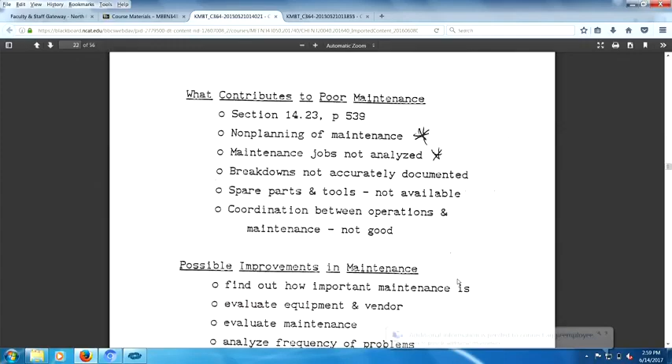What contributes to poor maintenance, this is often a test question as well. First problem is non-planning of maintenance. Maintenance jobs are not analyzed. Breakdowns are not accurately documented. Spare parts and tools are not available. That's typically what happens to me. I have a job around the house, and I don't have the tools, nor do I necessarily have the parts.

Coordination of the operations and maintenance. Basically, operations want to run the equipment, maintenance probably wants to protect the equipment. So you've got natural conflict between the users and the maintainers, and the coordination between these two groups may not be as pleasant as you would like them to be. Find out how important maintenance is, evaluate the vendor equipment, evaluate maintenance, analyze the frequency of problems, develop a maintenance schedule.

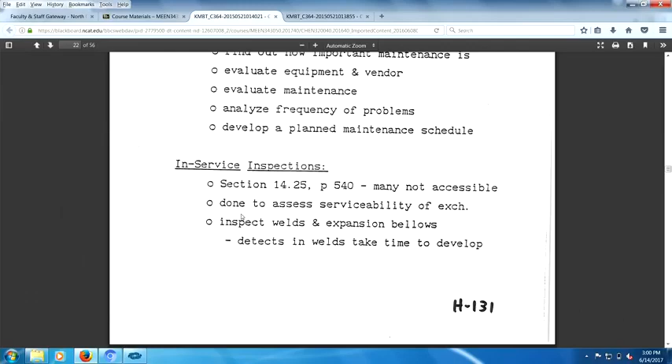All right, in-service inspections. Many items are not accessible. In other words, you need to get into your heat exchanger to see what's going on. Assess serviceability of the heat exchanger. Inspect welds and expansion bellows.

Defects in welds can take time to develop. Having tried to become a welder myself, there is an awful lot of metallurgy that goes into welding. I did not want to learn metallurgy, so I failed at welding. And the other thing the guy kept telling me, he says, welding's a young man's occupation. This was about 5, 8 years ago, I wanted to become a welder. I was 60, and the old man was younger than me, or about the same age, the teacher. He always would say welding's for young people, 10 minutes later he's saying the same damn thing. So I eventually caught on to what he's saying, he was telling me to get the hell out, too damn old. Like I said, you wouldn't want to have me as a welder.

And what's interesting about welding, and what really made me decide to stop my efforts, was sometimes you have to weld above your body, and it's possible for hot metal to drop down into your upper chest area, through your collar, so you've got something hot going down your torso. I thought maybe I should give it up. So welding where you're looking down at it is okay, but welding something over your head is not necessarily what I'd want to do. Anyway, welding is damn difficult. If you're a good welder you can probably make a lot of money, but not as much as a regular, sit back in the chair, drinking coffee type engineer.

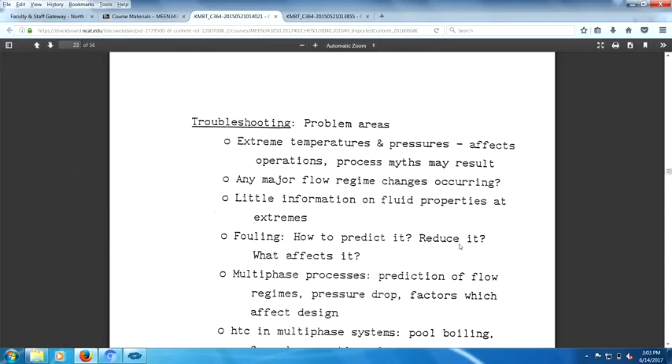Fouling: can you predict or reduce a multi-phase prediction of pressure drop flow regimes? Like I said, multi-phase is tough. You have all kinds of things that can happen: line freezing, caking, plugging, coking, all kinds of things. Multi-phase flow can possibly cause flow vibrations or tube vibrations.

Corrosion points are typically possible between the baffle and the tube, or the tube and the tube sheet. By the way, what do you do with a tube that's leaking?

Well, the hard way is pull the bundle and replace the tube. Some of these designs you can replace the tube, at least that's what they say. But stop to think about it - you're replacing a tube that's 2 or 3 tubes in. Replacing an outer tube might be easy, but replacing a tube that's 2 or 3 tubes in, now there's the rub. I don't know if that would be easy.

So when you have a tube with a leak in it, a smart thing to do is just plug it - put a big plug in it, both ends. That will prevent your problem with leaky tubes. After doing that, you plot the number of tubes plugged over time, and hopefully you won't have a problem - you'll just have a fairly linear failure rate on tubes.

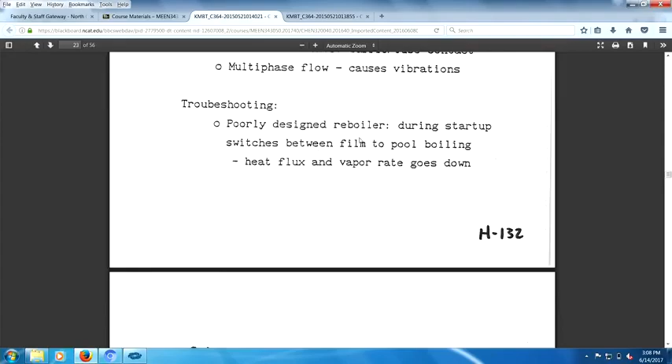And you don't want film boiling for sure. That's bad news.

Codes and standards. There's all kinds of codes and standards out there. We already talked about TEMA standards. The American Petroleum Institute has standards, and ASME has standards. What are those? They're codes, rules and recommendations for material selection, design, fabrication, operation, testing, and inspection. They set the minimum standards to ensure safe operation and design conditions.

Codes and standards are made legal documents only by the legislature, whatever government's hanging around. So there are only standards there. Most popular is ASME, and the written codes themselves could be 32 feet long - book after book after book after book. Quite frankly, in some jobs you're not any good unless you know the standards.

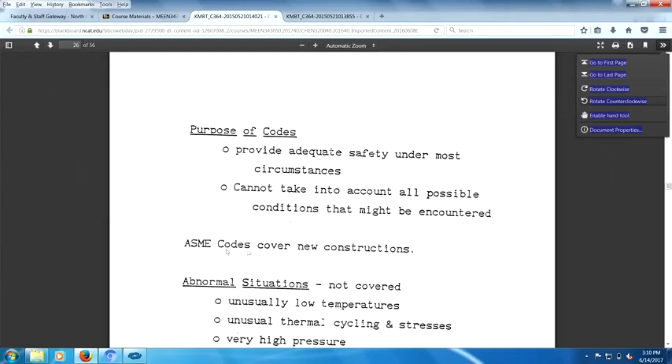Purpose of codes: provide adequate safety under most circumstances. However, it does not take into account all possible conditions that might be encountered. ASME codes cover new construction. However, what is not covered? Well, lots of things that are abnormal are not covered.

In other words, unusual temperature extremes, low or high temperatures, unusual thermal cycling and stresses, very high pressures, local hotspots, explosions and runaways, unusual vibrations and unusual attacks. So the codes do not cover abnormal situations. That means codes are limited.

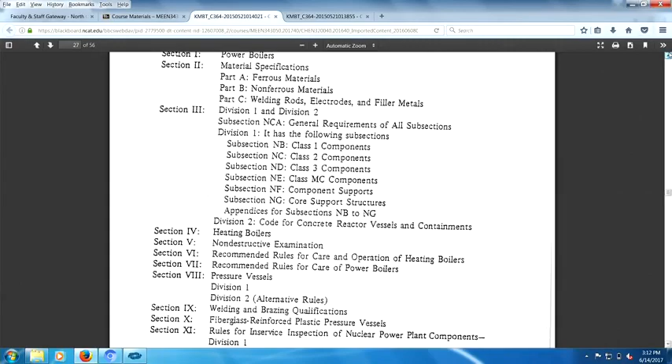Here's the ASME codes: ferrous metals, non-ferrous, power boilers all by themselves. Then you go through welding rods, electrodes, filler metals. Then you have heating boilers, non-destructive examination, and pressure vessels, welding, brazing, and whatnot. I'm sure there's a lot more to ASME codes than just this.

There are 11 sections, they say. I bet there may be more than that nowadays, I'm not sure. Oh yeah, rules for in-service inspection of nuclear power plant components - that right there is a room full of codes. Now they're put on discs, so maybe only a couple discs or maybe just one stick.

General requirements, methods of fabrication, materials, mandatory details of procedures, non-mandatory information suggesting procedures.

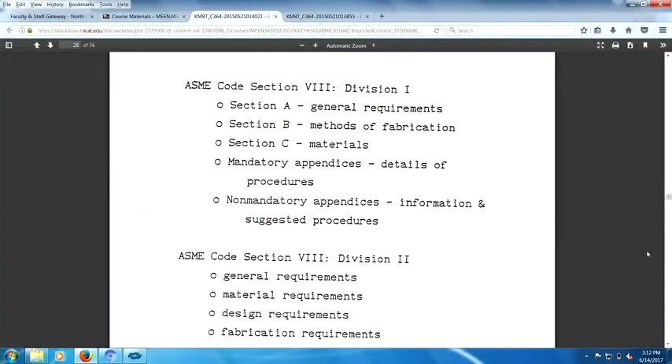General requirements, material, design, fabrication, pressure relief - very important, pressure relief. Inspection, radiography, testing, marking, stamping.

Here you go in and you take x-rays, right, and look at welds. You remember the big scandal about the Alaska pipeline and how almost every weld was bad in the Alaskan pipeline? Anyway.

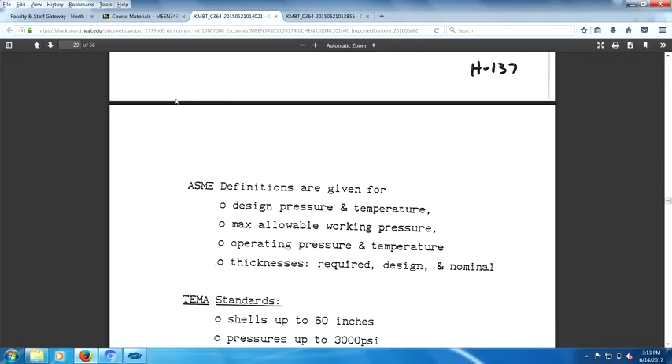ASME definitions given for design pressure, temperatures, allowable working pressure, operating temperature, pressure, thicknesses. Shells up to 60 - I don't know if that's true or not anymore either. I have to go ask TEMA.

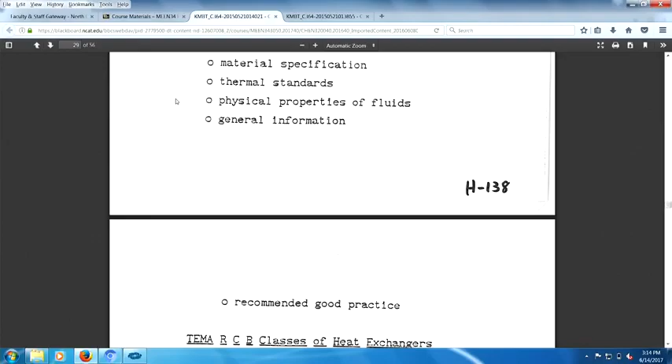Tubular Exchanger Manufacturers Association. Nomenclature, fabrication, general fabrication, performance, installation, operation, maintenance, mechanical standards, material specs, thermal standards, physical properties, general information, recommended good practice. TEMA has R, C, and B classifications of heat exchangers, recommended good practice.

Broad topics of the American Petroleum Institute: general suggestions, proposals, drawings, guarantees, design, materials, fabrication, inspection, shipment, and supplementary.